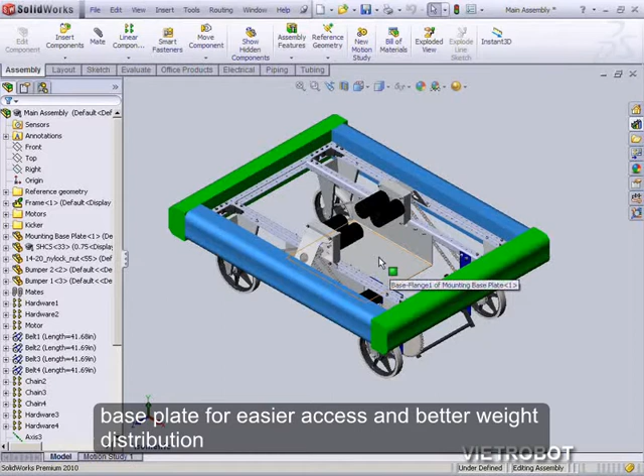Let's begin by opening the main robot assembly. Now we have to decide where to place the battery. We should place the battery near the back of the base plate for easier access and better weight distribution. Now that we have decided where to put the battery, we would like to have a clear field of vision so we can work on the battery more easily.

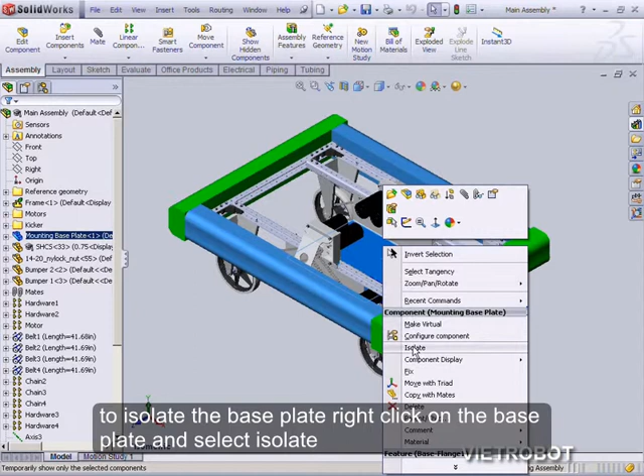Since we know that we only need the base plate to be visible, we can deploy the Isolate feature in SolidWorks. To isolate the base plate, right-click on the base plate and select Isolate. Notice that only the base plate is visible to our viewing.

Now that we have isolated the base plate, let's import the 12-volt battery into our assembly. If you don't have the battery, you can find it by searching for 12-volt battery in the 3D Content Central. Then let's place coincident mates between the battery and both side walls.

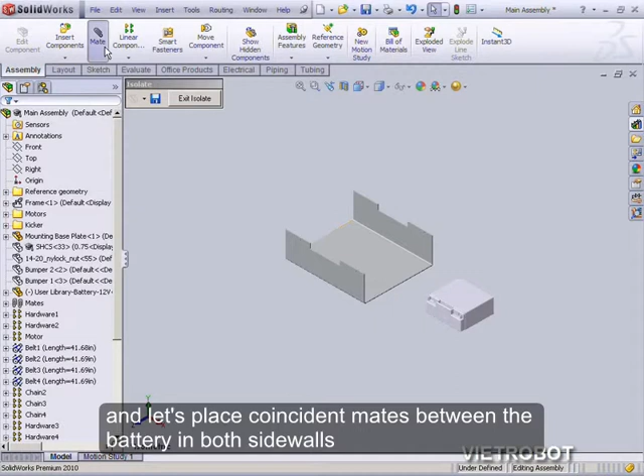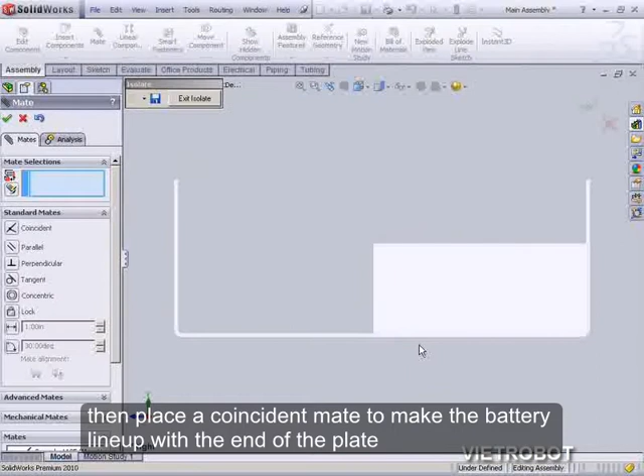Then place a coincident mate to make the battery line up with the end of the plate. Now we can make the bracket, which will hold the battery. Since this bracket is going to be using references from the main assembly, we have to make a new part inside the current assembly. We can do this by opening the Insert Component drop-down menu and clicking on New Part.

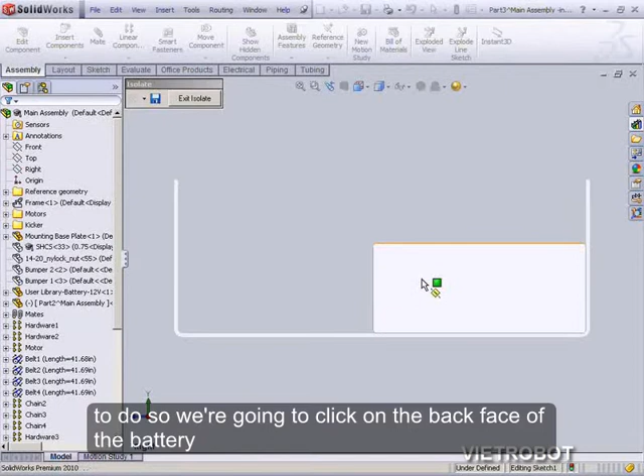Now we have to specify where we want to place the new part. To do so, we're going to click on the back face of the battery. In order to sketch our bracket, we'll rely on the Line tool in the Sketch toolbar. We first have to sketch the inside edges of our bracket. To do so, trace the top and open side of the battery.

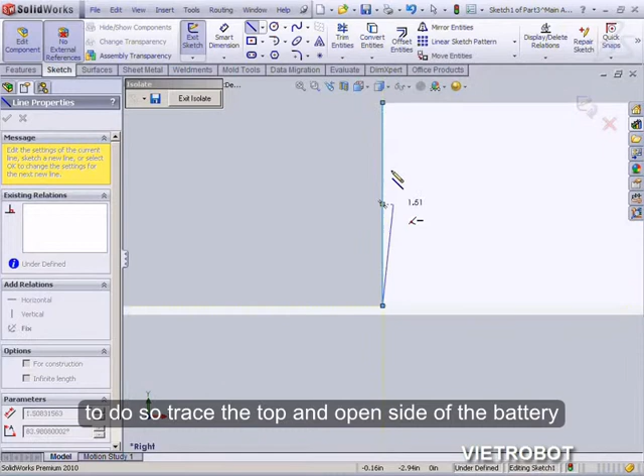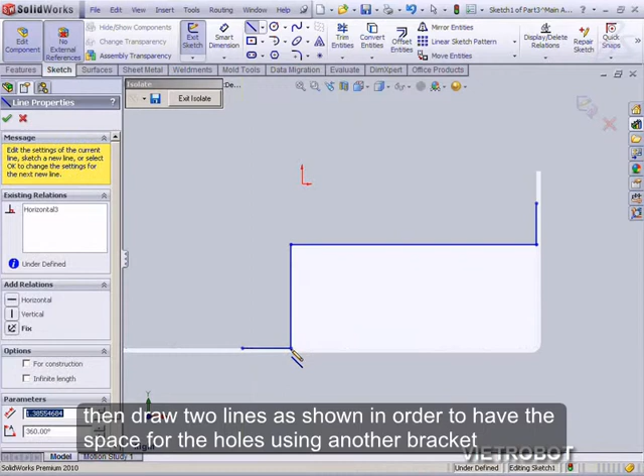Then draw two lines as shown in order to have the space for the holes used in our mounting bracket. Let's give each line a dimension of 20 millimeters. Apply the sketch fillet with a radius of 4 millimeters as shown on the corners of the intersecting lines.

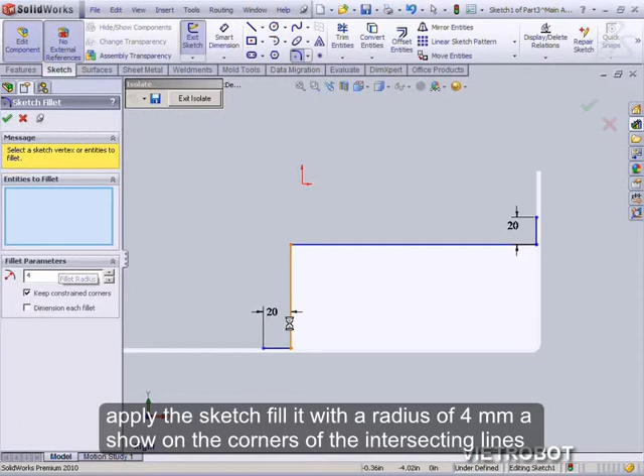Since our bracket would most likely be made out of sheet metal, we'll have to use the fillet tools to curve the corners so it's more durable. Now we can go ahead and make the outer edges of the bracket. Select the Offset Entities tool from the Sketch tab and then click on the sketch we've just created.

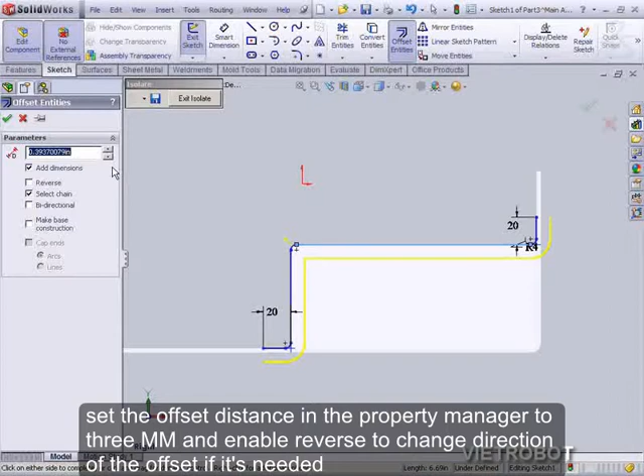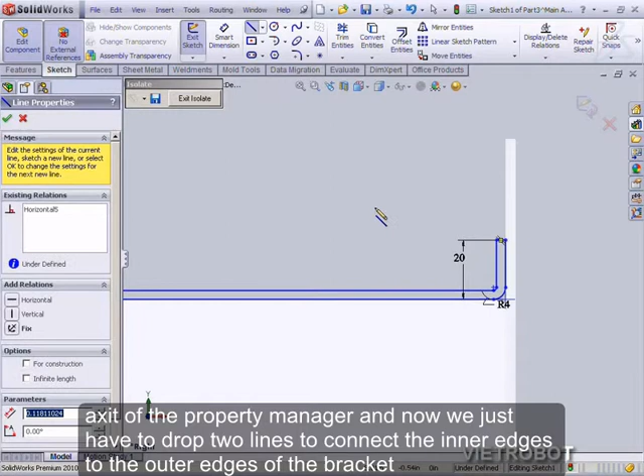Set the offset distance in the Property Manager to 3 millimeters and enable reverse to change direction of the offset if it's needed. Exit the Property Manager, and now we just have to draw two lines to connect the inner edges to the outer edges of the bracket. Then, use the Extruded Boss/Base tool and set our bracket extrude to be 100 millimeters wide.

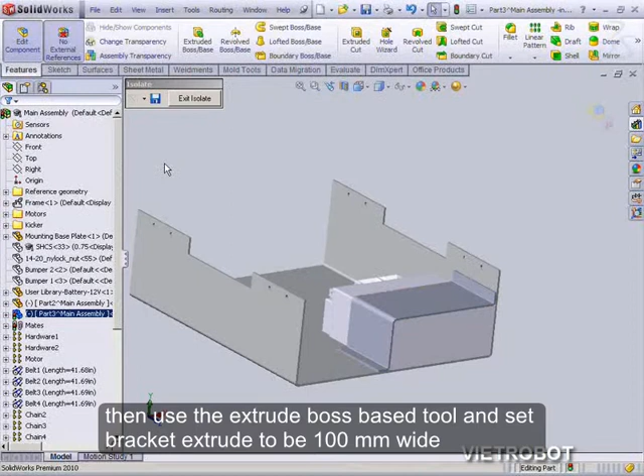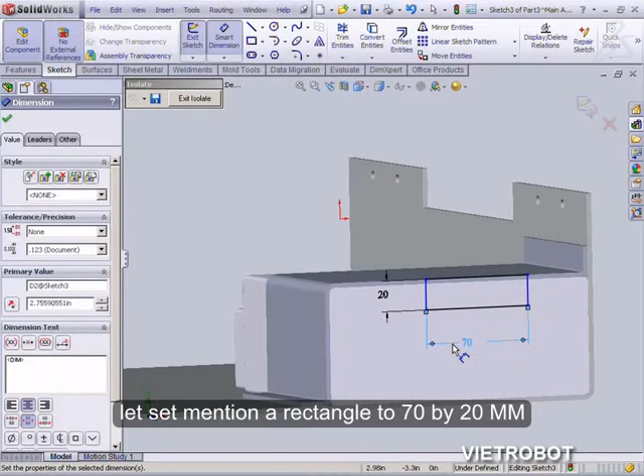Now we need to add the piece at the end of our bracket to restrict the movement of our battery. Start a new sketch on the side face of our bracket, and then draw a rectangle coincident with the top edge. Let's dimension our rectangle to 70 by 20 millimeters. Now we'll extrude the rectangle to be 3 millimeters thick, and use the reverse option if necessary.

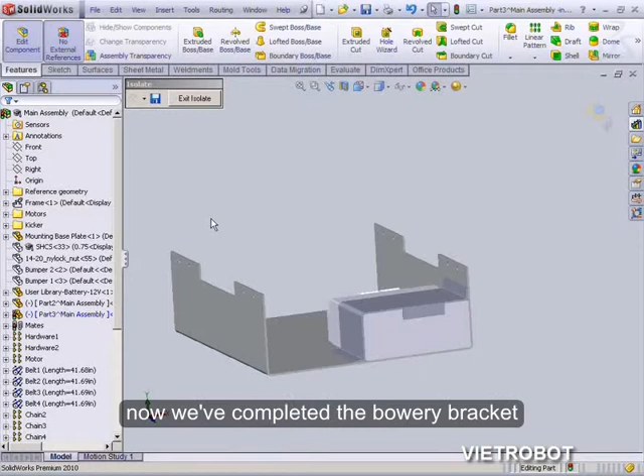Now we've completed the battery bracket. To go back to our main assembly, we just simply have to exit the Edit Component feature. To do so, click on the Edit Component button in the toolbar. Now that we've placed the battery and created the bracket to hold it in place, we can go ahead and click on the Exit Isolate button located near the top of our window to reveal the rest of our assembly.

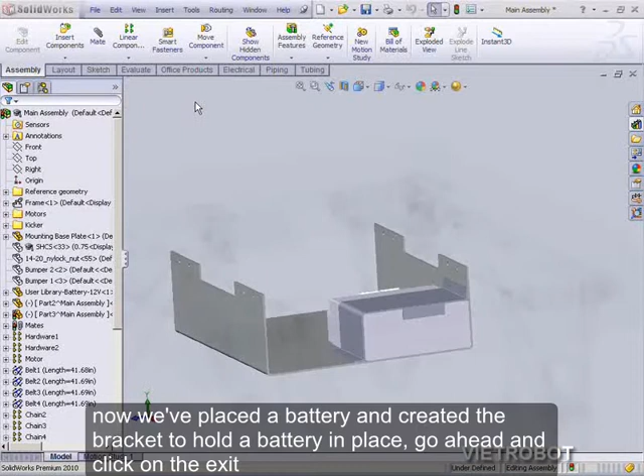In this video, we learned how to use the Edit Component tool to create a battery bracket in an existing assembly to hold a battery in place. We also learned how to use the Isolate feature to make large assemblies easier to work with.